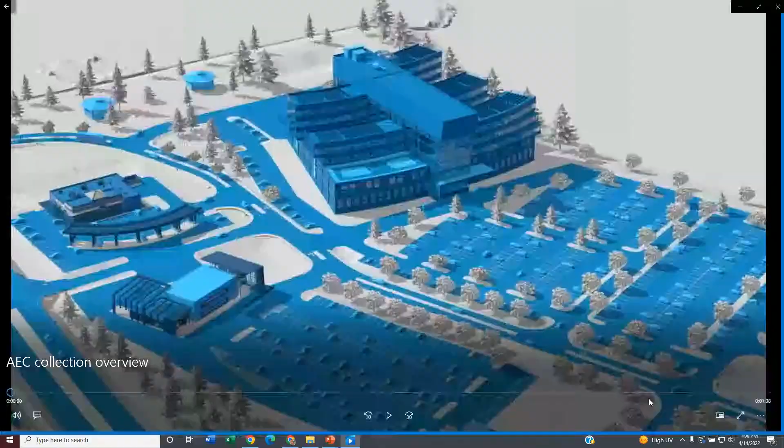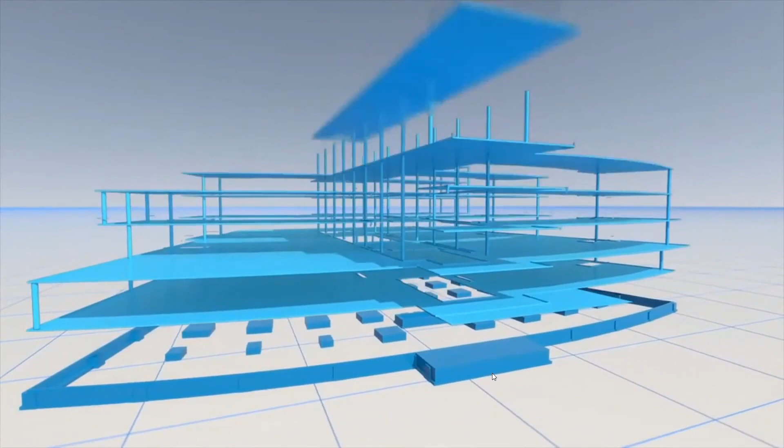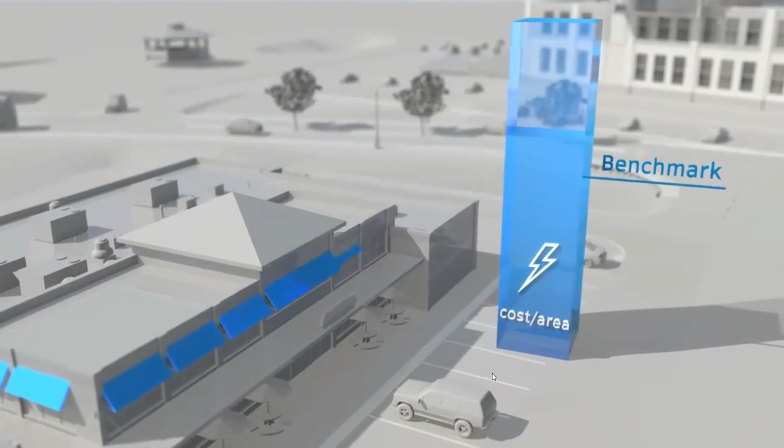Your work changes the map. To achieve success, you need an integrated set of tools that lets you coordinate work across teams, from design to construction. With the AEC Collection, every designer, engineer, and contractor has access to multidisciplinary workflows that let them create with ease. Explore what's possible and build with confidence, to deliver high-performing buildings and infrastructure that transform lives and communities.

Good afternoon everybody. My name is Phil Marshall, and I start with that little clip to give everyone the chance to see that they all fit into this story.

Surveyors, architects, mechanical engineers, fabricators, contractors all benefit by having a continuous flow of information from concept to commissioning. And if you have the Autodesk AEC Collection, you already have all of the tools you need. Not just design tools, but detailing, analysis, and collaboration tools also. You just have to find how to use them.

That's what this webinar is intended to do, show you examples of workflows that people have found productive using the tools available. During the webinar, if you have any questions, just enter them into the question box on the left side of the screen. We'll have a Q&A session at the end.

So how can using these tools help you? Each of the tools in the AEC Collection was developed to address a particular need. Honed by years of use in the real world, these tools are the most effective for the task. And they are linked together so the flow of ideas and data is smooth and largely invisible. No more saving in one format, moving a file, finding the file.

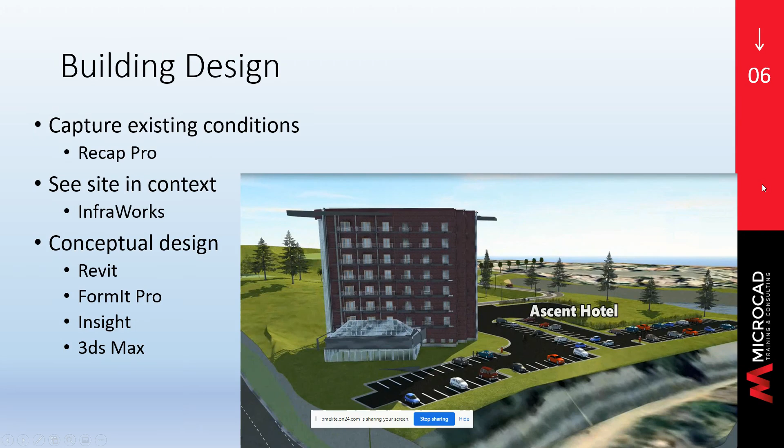FormIt Pro and Insight work hand in hand with Revit to complete the building design. Let's look at how FormIt can be used with Revit in the renovation.

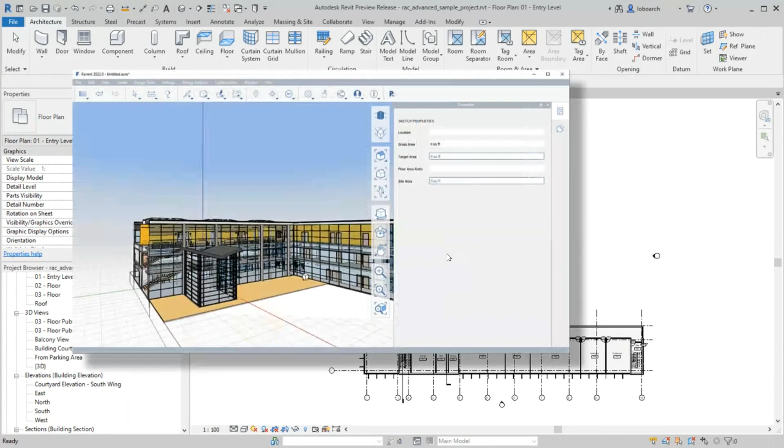During the conceptual design phases of a project, it is helpful to be able to quickly work through design ideas. FormIt is an Autodesk tool used to quickly design in 3D and help you work out ideas early in the design process. FormIt models are used in Revit as context or as a basis to further develop the design.

To help you work in these applications, use the 3D Sketch tool in Revit to take models from Revit and use them in FormIt. For example, you want to explore possibilities of adding a new portion of this design, but are not ready to work on it in Revit. You would like to use the freeform tools available in FormIt. Open a 3D view of the model. The 3D Sketch tool allows you to transfer geometry from your Revit session into a FormIt session.

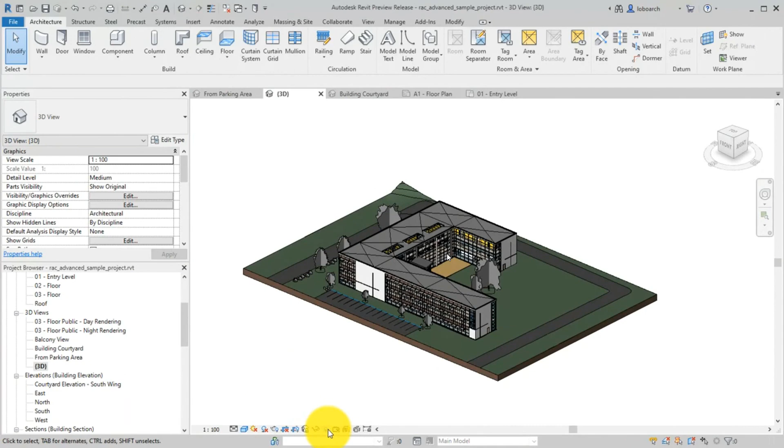You can transfer the entire model from Revit, or you can take just selected geometry. In this example, we only want to work with a portion of the design close to where the addition will be. Here, a section box is used to limit the geometry transferred.

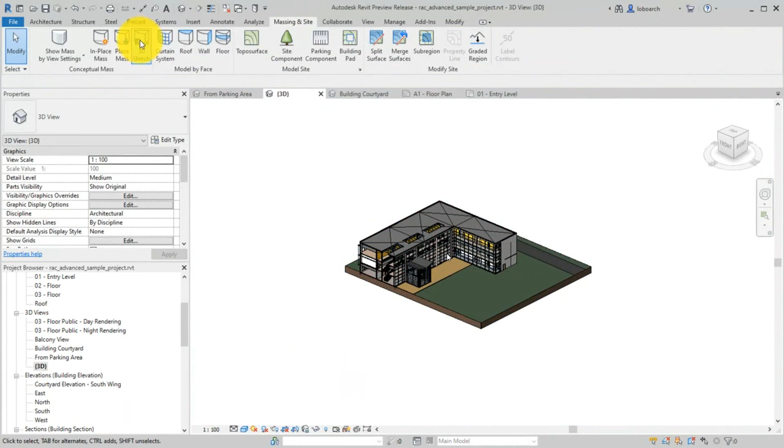It is possible to select the geometry you wish to transfer. On the Massing and Site tab, click 3D Sketch. In the Launch FormIt 3D Sketch dialog, select the option for the transfer: All Visible Objects, or Selected Geometry. If using selected geometry, the geometry must be selected before you click the 3D Sketch button.

In this example, we have used a section box to control the visible geometry. Select the Visible Objects option.

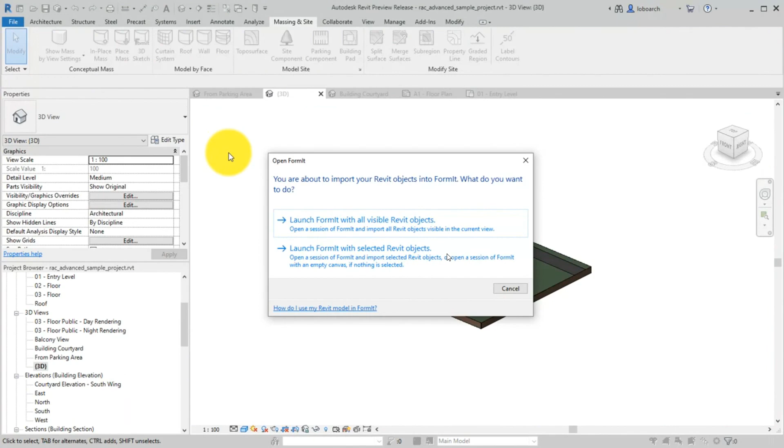FormIt Desktop opens, and the geometry from Revit is transferred into a FormIt model where you can work on the design. If the FormIt session was opened using the 3D Sketch functionality, use the tool in FormIt to send the design back to Revit.

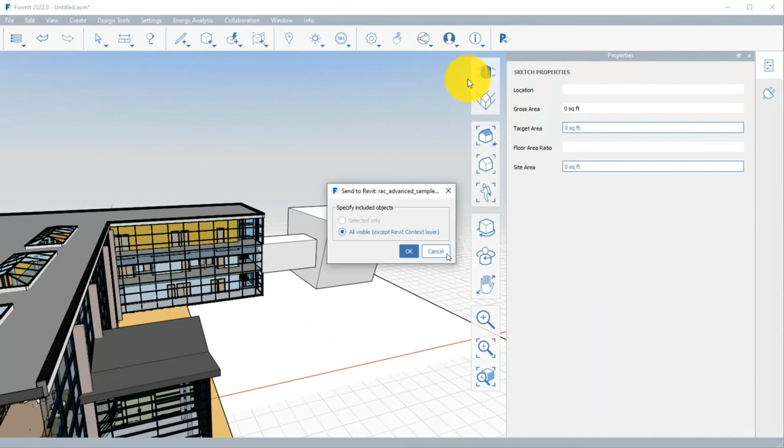Opening a 3D sketch from Revit with Revit geometry in a free-form modeling tool like FormIt offers a way for you to quickly explore design ideas that can easily be used in Revit later.

So FormIt and Revit complement each other to help you finish the conceptual design easily and fluidly. With bidirectional interoperation, you use the best tool for the design job.

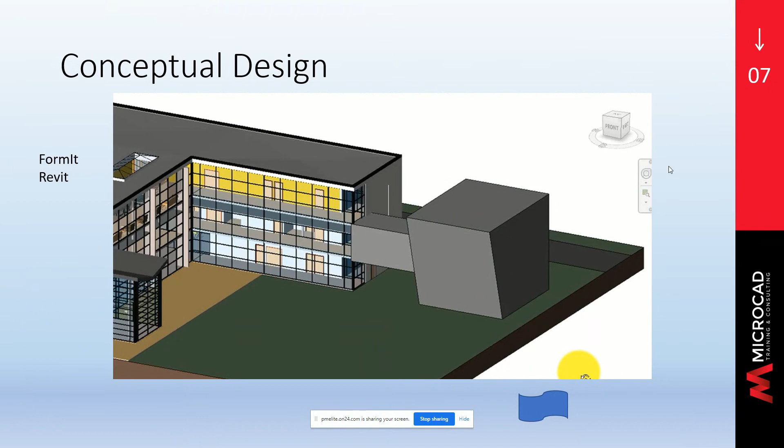Horizontal construction is easier with the tools in the AEC collection. You use Recap Pro to capture existing conditions and see the overall site with InfraWorks. Conceptual design of the project can be done in Civil 3D, with Revit helping for any buildings like toll booths, stations, and associated structures. Insight can provide energy studies to rank alternatives. And 3ds Max lets you create compelling visualizations for public presentations.

Let's see how the AEC collection can be used for infrastructure design.

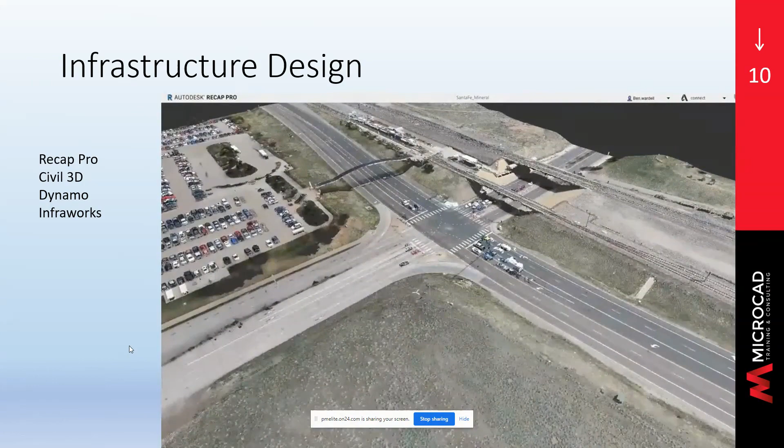The Autodesk AEC Collection enables users to create roadway and highway models with greater efficiency than ever. In Recap Pro, users can view and manage point cloud data obtained from LiDAR or drone technologies. Users can import the point cloud into their InfraWorks model seamlessly.

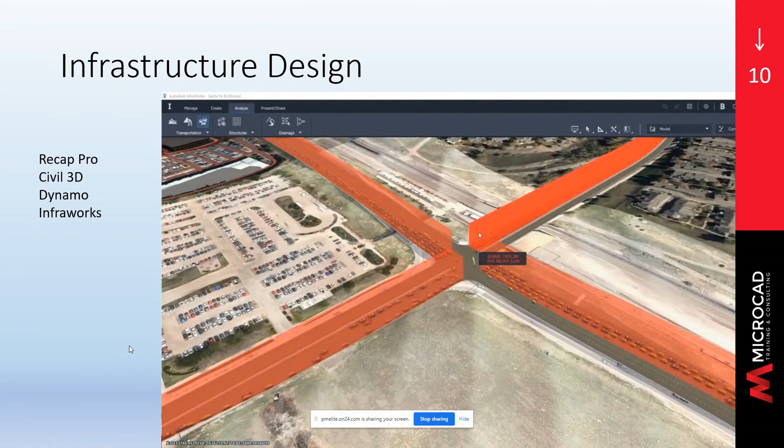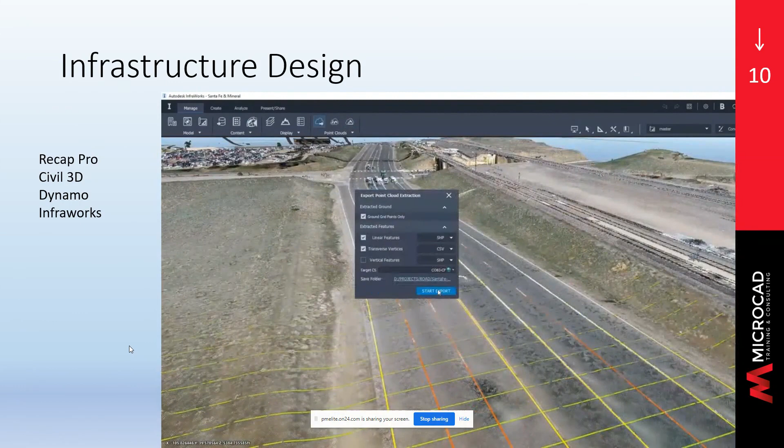Users can run traffic or mobility simulations that reflect existing traffic conditions. InfraWorks will also extract critical information from the point cloud with the automated linear feature extraction tool. This data can be fully utilized in Civil 3D during the design process.

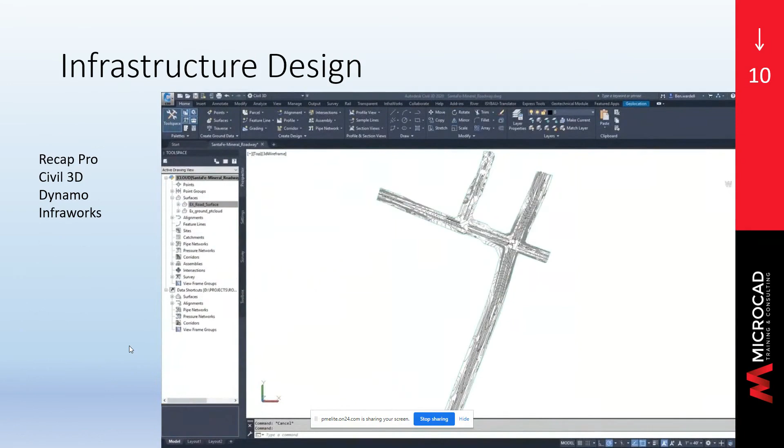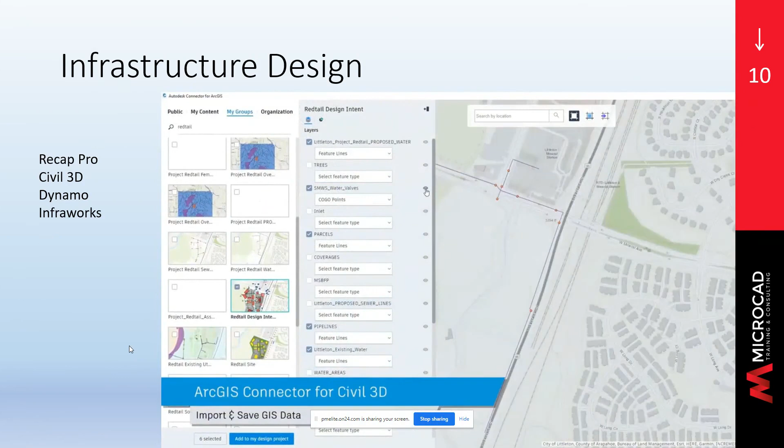Collaboration in Civil 3D and BIM 360 Design helps design teams stay connected. With Civil 3D, users can accurately reflect existing conditions with greater detail. The ArcGIS connector is now available for Civil 3D and allows users to access a world of data that can be imported into their highway models.

Leveraging the tools in Civil 3D, roadway designers can quickly lay out alignments, feature lines, and profiles based on design criteria. This data can be used to create a dynamic roadway corridor that can be easily modified, then updated automatically. These corridors contain the quantities required for cost estimates and reporting details.

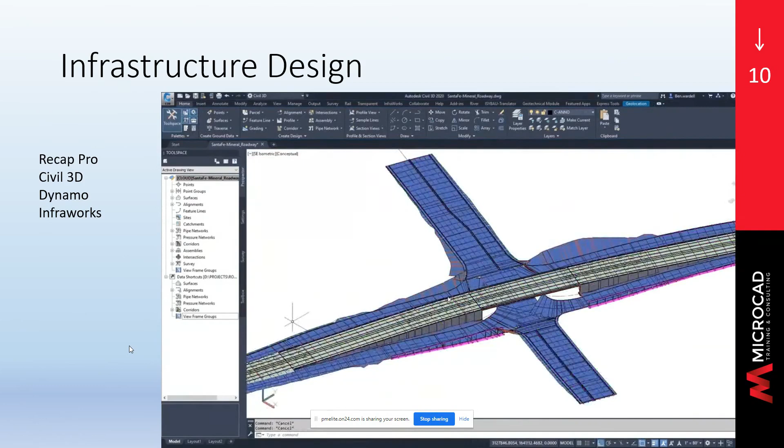Users can now experience the power of design automation by utilizing Dynamo for Civil 3D, which helps process routine or complex tasks quickly and effectively.

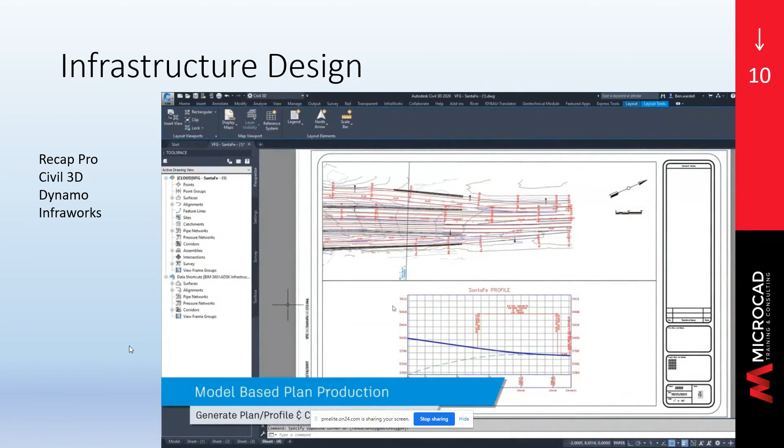The tools in Civil 3D help create plan and profile layouts and sheets based on the roadway corridor models. Users can also generate dynamic roadway cross-sections that can be used to quickly create cross-section sheets for plan production.

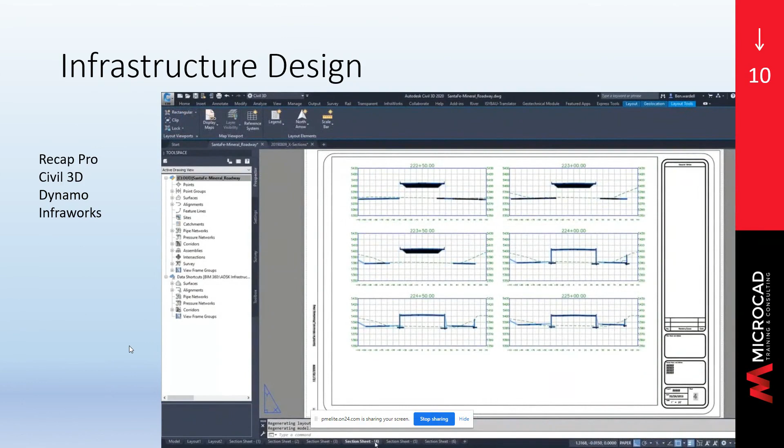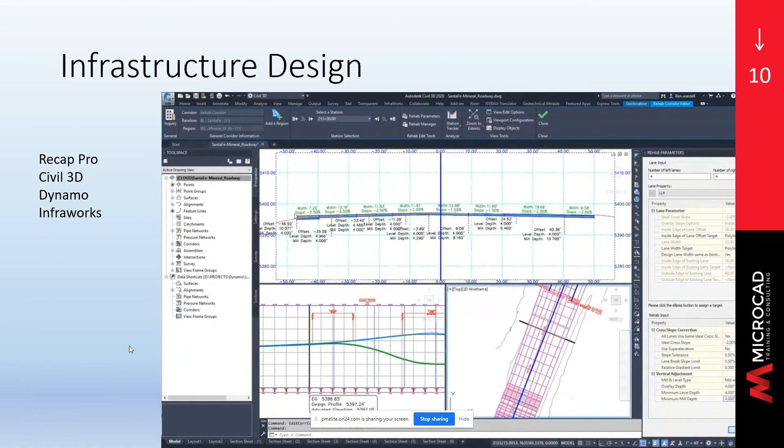The roadway rehab corridor can be created based on point cloud data. The corridor can read existing pavement and edge lines to deliver precise pavement quantities and details. Users can add corrective measures to improve specific areas.

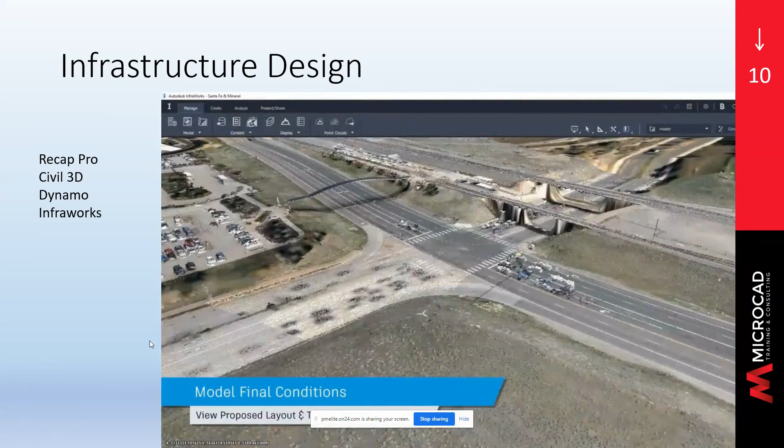InfraWorks allows users to view and drive the final model to inspect design details. These tools help to create a final product containing precise details, feature properties, and design attribution. All this and much more is available with the Autodesk AEC Collection.

As the design solidifies, you can use Advance Steel to detail the framework and connections, Structural Bridge Design to automate some of the tasks in bridge design, and Vehicle Tracking to analyze and ensure vehicular access.

As a project moves into pre-construction, the structural components need to be fabricated. Advance Steel provides detailing tools and the ability to create shop drawings. Let's see how that works.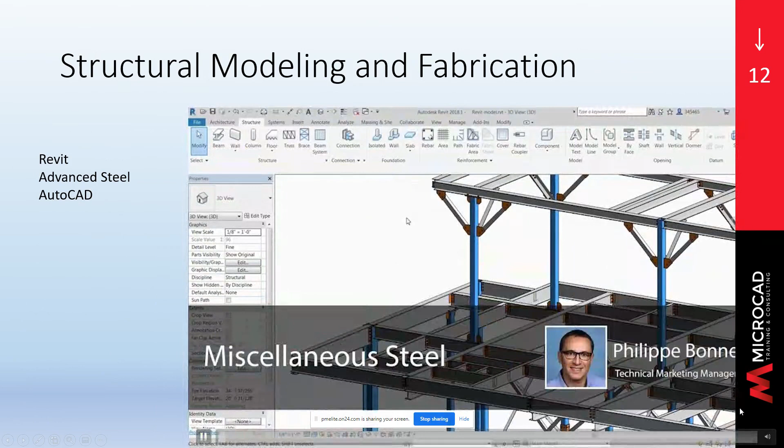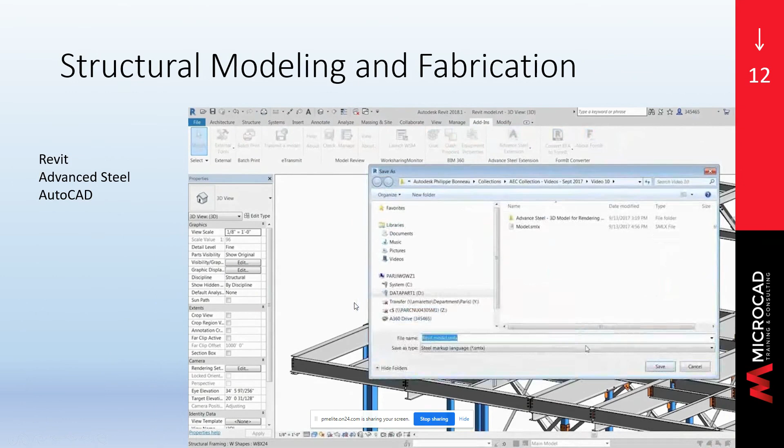Structural engineers and fabricators can use BIM workflows that connect steel design to detailing and achieve extraordinary results. Once structural steel has been modeled in Revit by the structural engineer, design can be easily communicated to the steel detailer, who can complete the project by adding miscellaneous steel where needed.

The Advanced Steel model contains not just the structure, but also steel connections, keeping them as intelligent parametric connections. Advanced Steel has powerful tools for miscellaneous steel creation to quickly generate straight and spiral stairs, straight and curved railings, and cage ladders with the use of dedicated wizards.

Let's start with the creation of a railing on the top of this floor beam. It's easy to go through the different options in the dialog, specify the connection type between posts and supporting beam, and change the end of the handrail type.

Elbows can be automatically created between the last post and the top handrail. For creating a similar railing on a different floor beam, the steel detailer can reuse predefined settings previously saved in the advanced steel library, or transfer properties from the first railing to the second one. The railing can be easily extended or shortened by moving the blue grip at one of the railing ends.

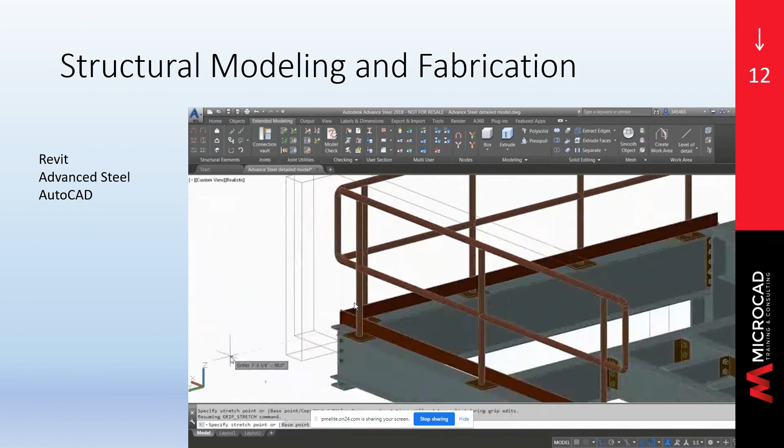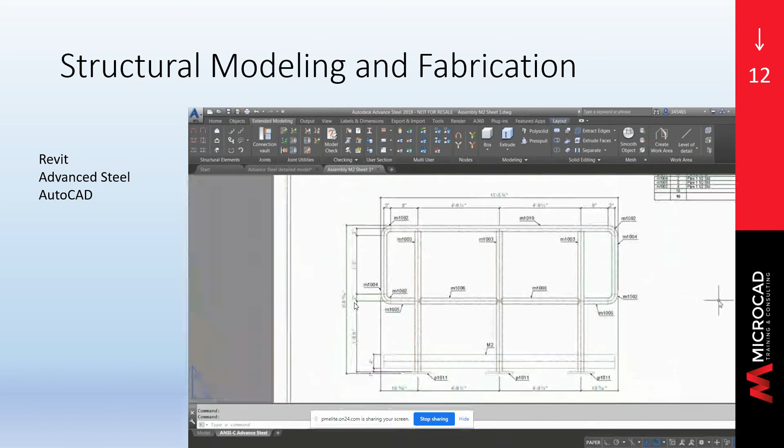Shop drawings can be automatically generated by using one of the different drawing styles dedicated to miscellaneous steel. Views of the railing get labeled and dimensioned automatically on the assembly drawing.

Once the model is completed, it's easy to export it back to Revit. The structural engineer can use the synchronization feature to load the file and see the differences between the Revit model and the advanced steel model. The different colors clearly show what has been added, modified, or deleted.

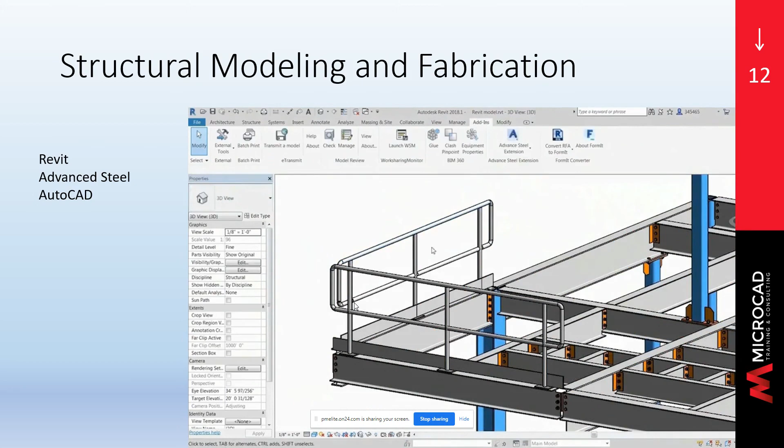The Revit user has full control of these changes and can either accept them one by one or apply all of them in one click. As a result, both the designer and the fabricator get an accurate Revit model containing contributions from both teams.

So the bidirectional connection between Revit and advanced steel lets the designer and the fabricator both use the same information and work on the one model.

After the MEP engineer designs the systems in Revit, allowing for size and flow, the ductwork and piping have to be fabricated. This is done with Fabrication MEP.

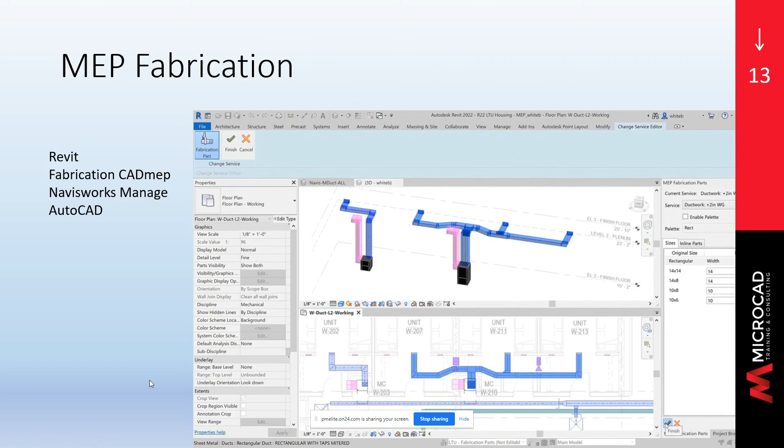The AEC Collection provides MEP designers, engineers, and contractors a set of tools that supports BIM on their MEP projects from early stage design through construction.

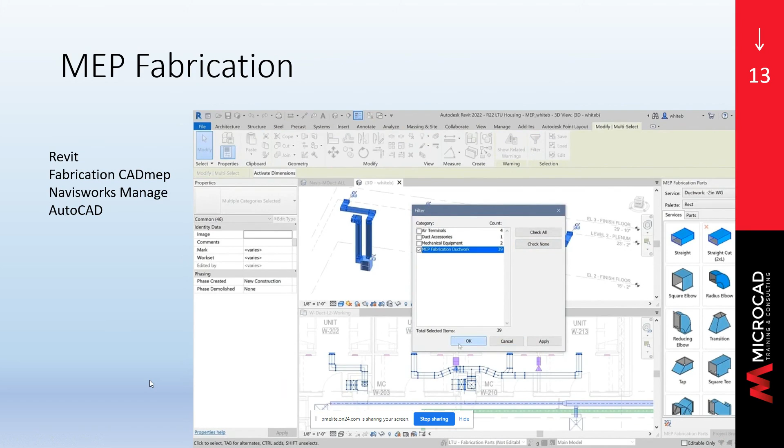Use BIM-based workflows to move more seamlessly between design intent and detailing for fabrication. By starting in Revit, you can quickly and easily convert design intent models to fabrication parts using Revit's Design to Fabrication tool. You can also export model data from Revit to Fabrication CADmep, connecting your BIM data to existing workflows for prefabrication and construction without duplicating work.

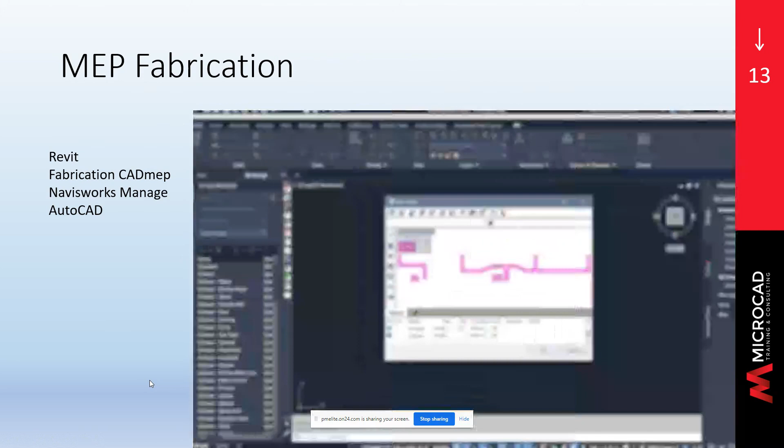Fabrication CADmep is an AutoCAD-based tool that enables further detailing of MEP components with extensive libraries of real-world components and connections. Import MEP models into Navisworks Manage and deliver clash-free coordinated MEP models, avoiding costly rework on the job site. Use the Clash Detective feature to perform advanced 3D coordination prior to construction.

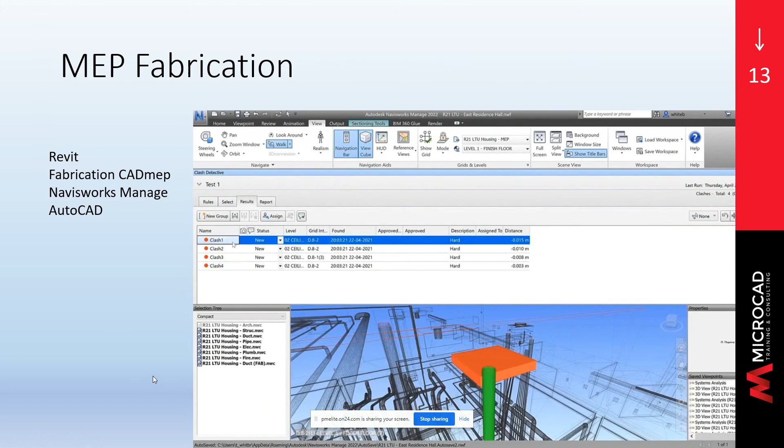Other features are also available, such as the Timeliner for 4D construction sequencing and quantification to aid in 5D cost estimation. Use the powerful connected BIM capabilities available in Revit, Fabrication CADmep, and Navisworks Manage through the AEC Collection to improve design, coordination, and fabrication of your MEP projects.

Again, these tools allow a smooth workflow between the engineer and designer in Revit and the designer and fabricator using Fabrication MEP. Along with the design processes, you have to predict building performance, and there are several tools in the AEC Collection to help.

The software package Robot performs structural analyses to determine how the building responds to different loading: normal loads, wind pressure, and seismic shaking.

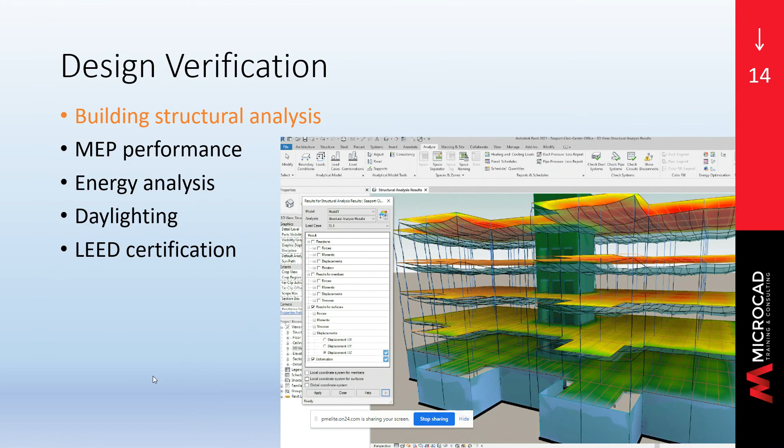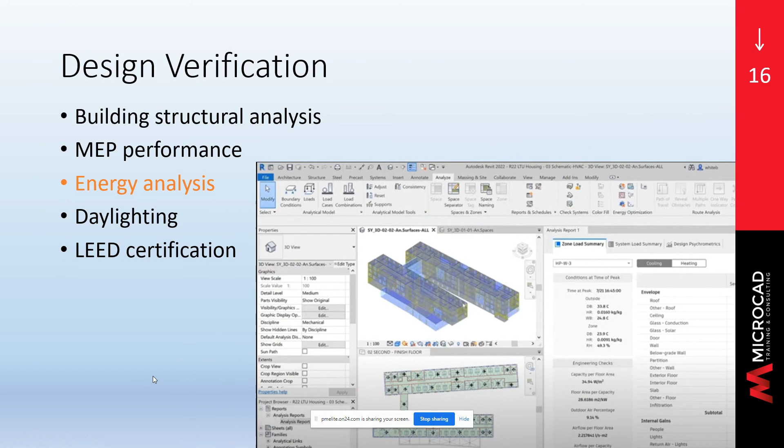Built into Revit is the ability to calculate heating and cooling loads to enable mechanical engineers to size the systems for optimum performance. Revit and Insight perform whole building analyses to calculate the energy efficiency of the structure and insulation. It suggests ideas for improvement, including solar panels, wind turbines, and shading panels.

Daylighting is an important design element that reduces energy requirements, humanizes the workspace, and brightens the space and the occupant's mood. Revit, with a cloud-based plugin, allows you to calculate the amount of daylighting available and track it over a day or a year.

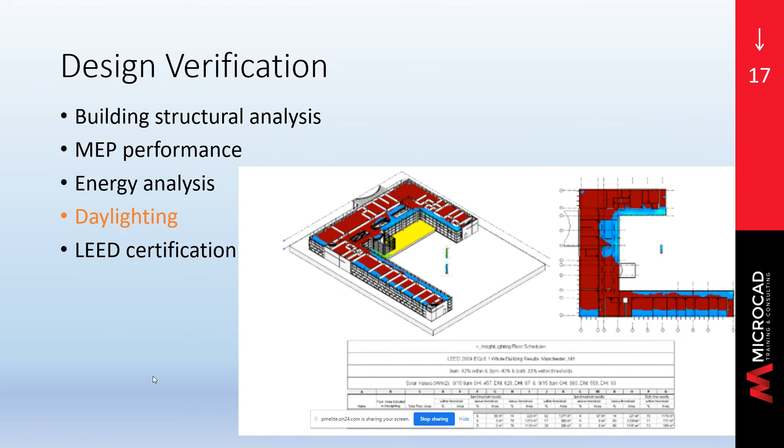Many building owners are looking for LEED certification, either to save operating costs or as a green cachet. Revit uses the Green Building Studio calculation tools as a cloud-based tool to determine the characteristics of the building and suggest ways to meet the certification requirements.

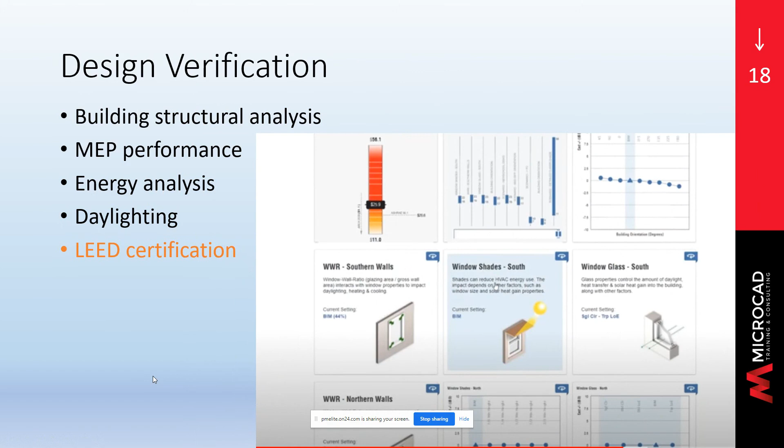When the project gets into construction, the AEC Collection provides tools to manage a job and collaborate with all of the stakeholders. The Revit model is a single source of truth, so the cloud data storage capabilities allow everyone to access it anywhere, in the office, in the trailer, on site, from any device, laptop, tablet, even phone.

Navisworks Manage lets you sequence the tasks and visually see the process on the screen before it is real. And to monitor progress, you can fly a drone on a regular basis and use the resulting point cloud and models from ReCap Pro to see what's been accomplished and what's left to be done.

With the AEC Collection, Autodesk gives you unlimited cloud storage of your data. Autodesk Docs is your portal to this storage, as well as providing collaboration tools.

Participants in the project—architects, engineers, consultants, contractors—all securely access the data using the cloud. Permissions are set so each organization has access to their data, but no one else's. More than just file management, Autodesk Docs provides for markup, management of issues, reviewing workflows, and transmittals.

Since it's an intelligent model, this tool shows information from the content of the file, for example, the manufacturer model of equipment in the building.

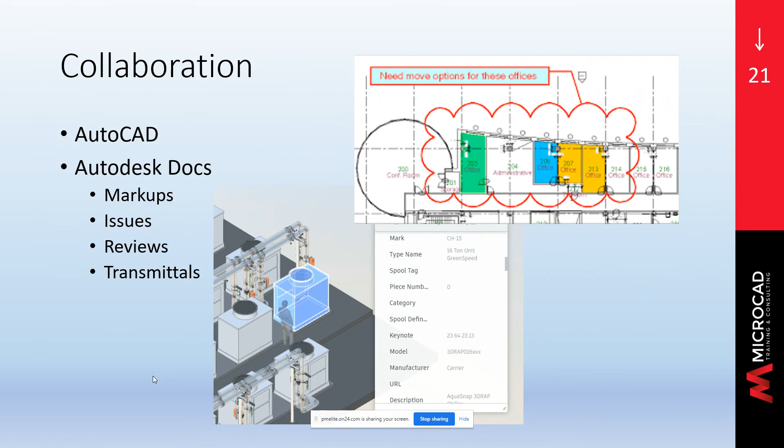So what we have seen is that the many tools in the AEC Collection can be used to increase your productivity, create smooth and fluid workflows, potentially expanding your revenue by offering services you aren't offering now, and reducing risk by early collaboration and coordination and predicting performance of the building, all using the same data platform, ensuring everybody works with the most current data.

And if you have the AEC Collection, you have these tools already. Take advantage of them. I challenge each of you to choose one new tool and try it this month. Add it to your workflow and see the results. I bet it becomes permanent.